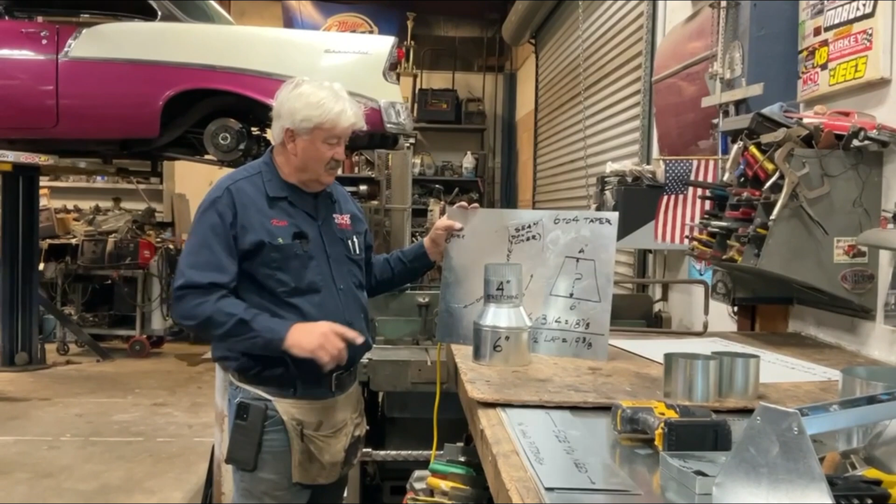We've made a funnel, and today we're going to add a collar on each end, turning it into a transition. So what we have here is we used the funnel we made last time, and I added a 6-inch collar to one end. That's one of the things we're going to do tonight. We're also going to add a 4-inch collar to the other end.

We talked about this before, that whenever you have the opportunity, if it's up to you to decide how tall your transition can be, then the shorter you make it, the more likely it is that your apex is going to end up on the piece of metal that you found behind the shear. So what we have here is, let me grab my pen.

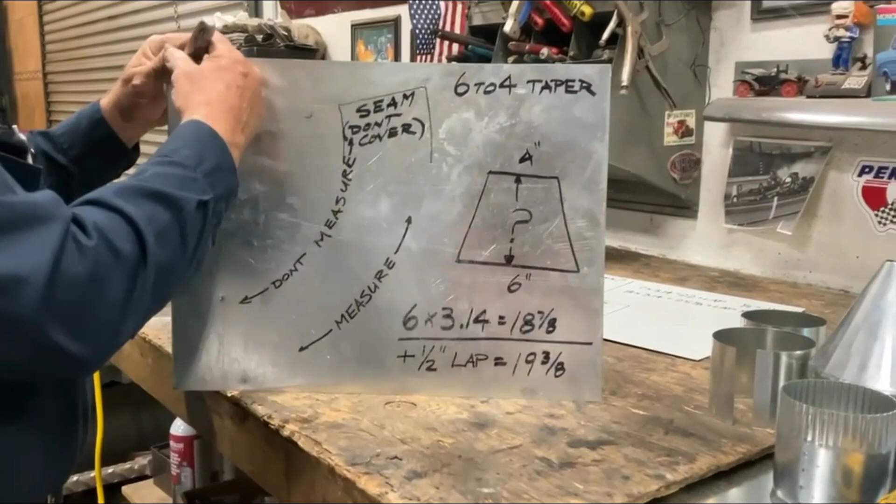So we've determined we're going to make a 6-to-4 taper, but we could draw the entire taper. We could project this line up, and that line up, and where those two lines intersect, that would be our apex.

But we don't need to draw the entire cone. We can draw half the cone. Let me show you where half of it is right here.

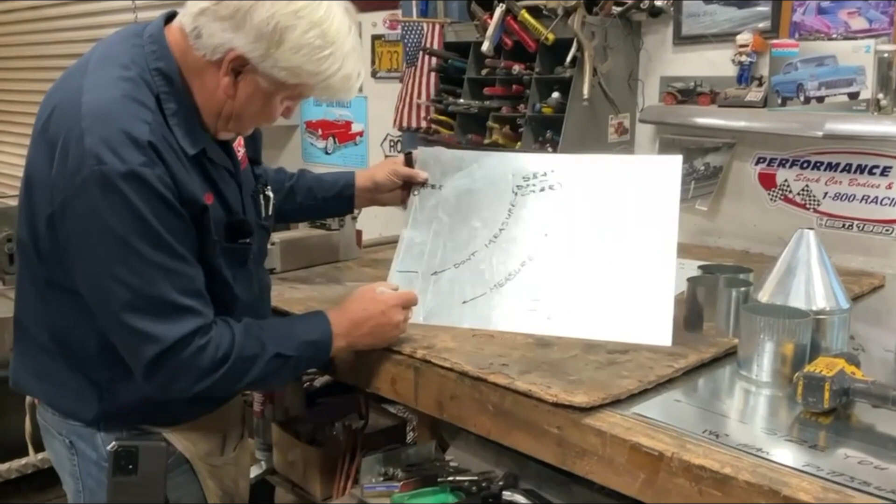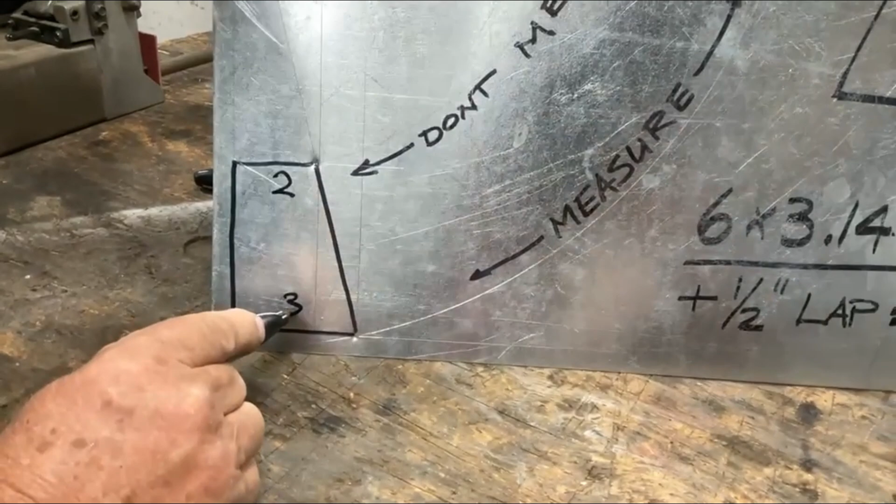I'm going to try to do this with the least amount of glare possible. So this is half of our cone. It's a 4 to 6. So we all understand this is a 2. This is 3, 3 is half of 6, 2 is half of 4. So we've drawn half of a side profile.

Now I like to start with a half-inch line in from the edge of the metal. So we're going to take our scribe and make a half-inch line. Now we're going to take a straight edge from that point to this point, and it's going to come up and meet here at this apex.

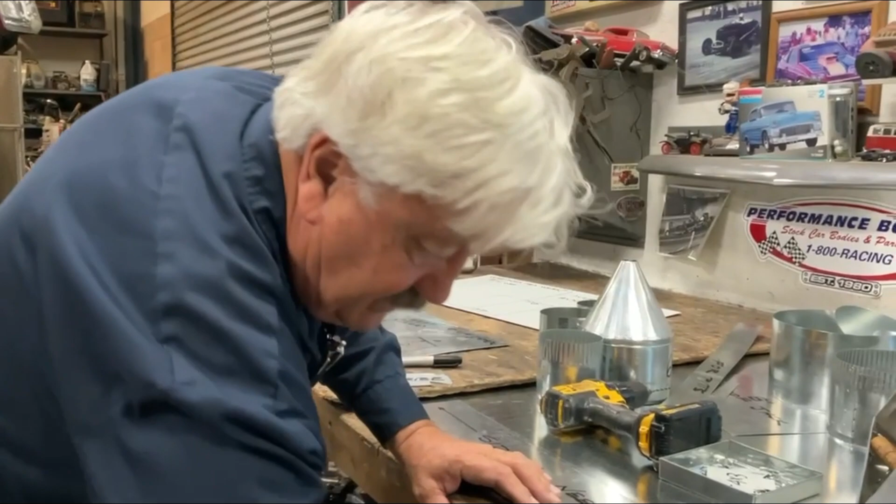From that apex, we are going to take our dividers that we keep right here next to our heart, like a letter from home. We're going to put one end of our dividers at the apex, the other end at this part of the side profile. Here we go.

And we are going to drag our divider and hold the metal. Now we're going to move up to this one, keeping our other part of our dividers at the apex. Just go back and double check it. You never know when, in the adjustment, you may have moved and thrown everything off.

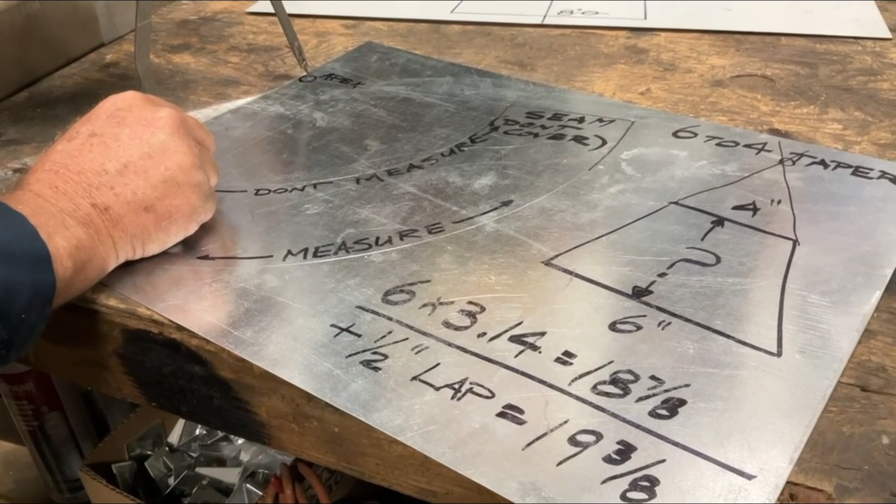Now we're here, we're going to go ahead and make this line. As you can see, I've already made this line, but we're going to go ahead and make it here for clarity. All right, now we are going to reach into our hidden compartment. There it is, tape, ruler.

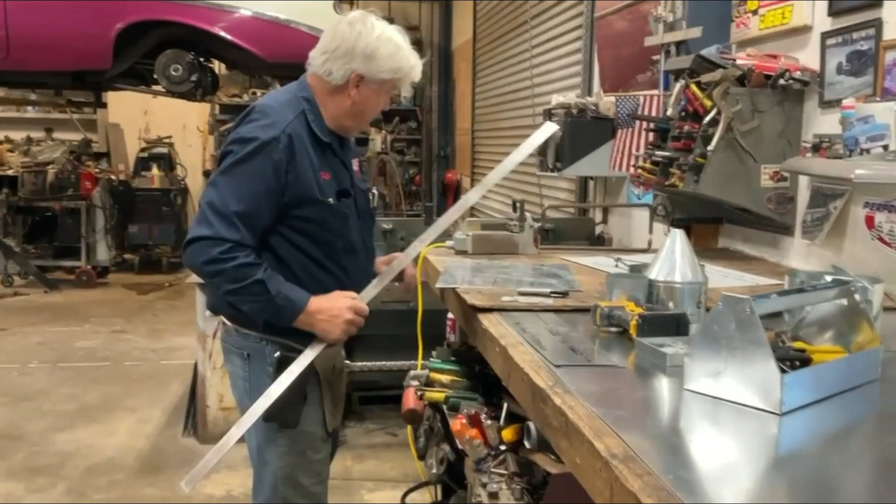Reach over here to our screwdriver that we turned into a scribe. Now come on back in nice and close. So we're going to go right back to the point where we're at the half of our profile.

And we've only drawn a half because that's all we need. Really all we needed was this distance and this distance, so we didn't need to draw the whole profile. So we're going to start at this point and make a line beginning at the apex back to this corner.

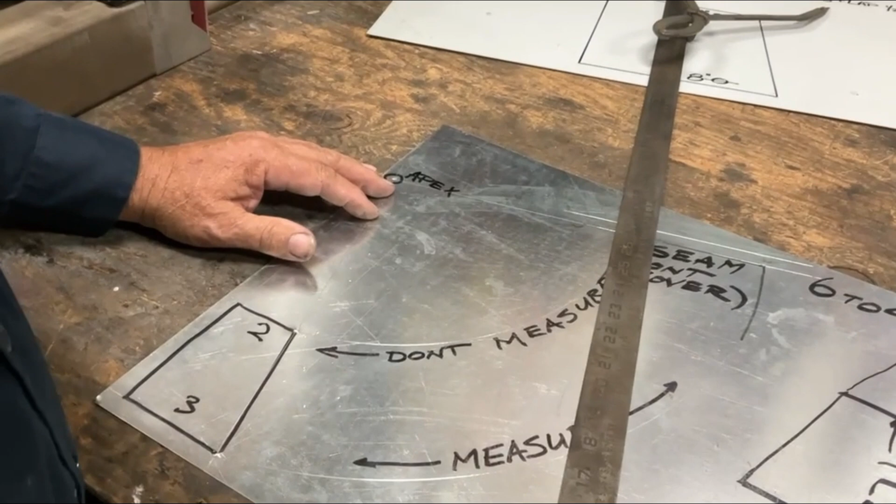I like to use a scribe because it makes a very fine line, and then if I ask you to cut this out, you don't have to ask me which side of the line you'd like to cut it on. Let's say instead of a scribe,

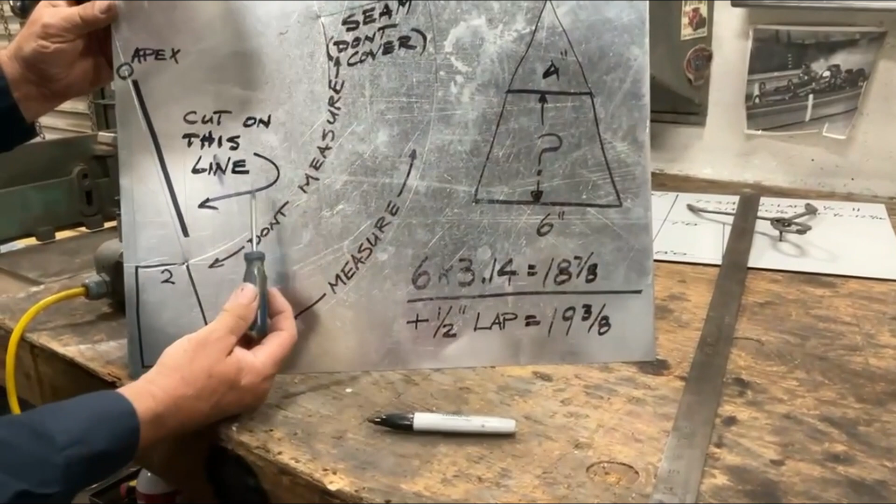I used that felt marker, and I told you to cut it on this line. Without further instruction, you wouldn't know that I mean this side of the line, this side of the line, or the middle of the line.

So that's just one more variable that we're going to eliminate by using a scribe. The other thing nice about a scribe is it doesn't use ink, you don't have to wait for it to dry. And if it was a pencil, we don't have to ever sharpen it. So let's go back, we've swung two radiuses here.

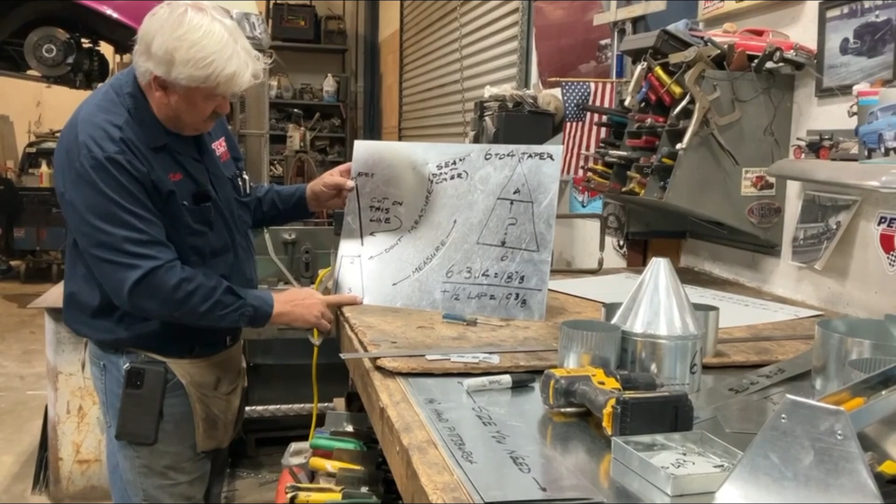One starting at the apex down to the bottom of the transition, one at the top of the transition, and back to the apex. You may not be able to see this line, but we just scribed it along here.

Now what we're going to do is the base of our transition is 6 inch diameter. We're going to take 6 times pi, 3.14, and that equals 18 7/8. So that is going to give us our stretch out, sometimes called SO, but we're going to call it stretch out.

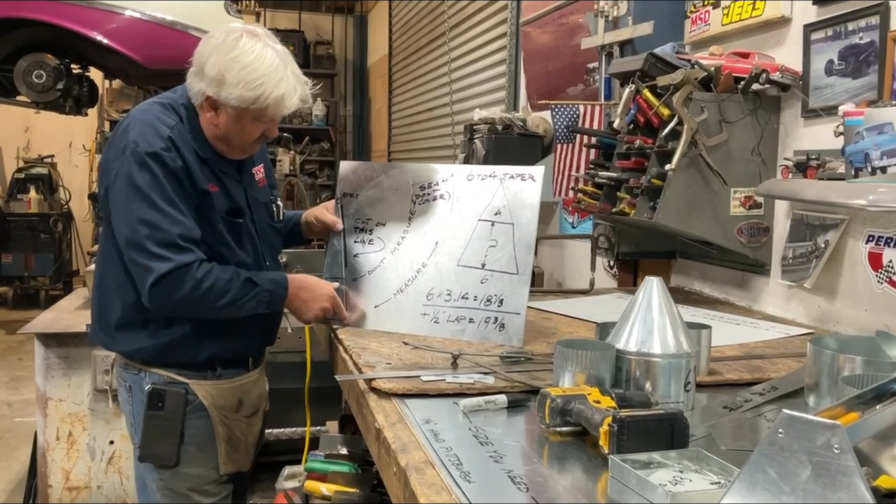So beginning at this point where our fitting begins, we're going to measure right on top of that line, and we're going to make a mark at 18 7/8.

This is where the steel ruler is nice. This is very difficult to do with a wooden ruler.

All right, so I'm going to put one part of my ruler on there. And since I've already marked it when you guys weren't looking, I've already marked it at 18 7/8. Let's go ahead and circle that.

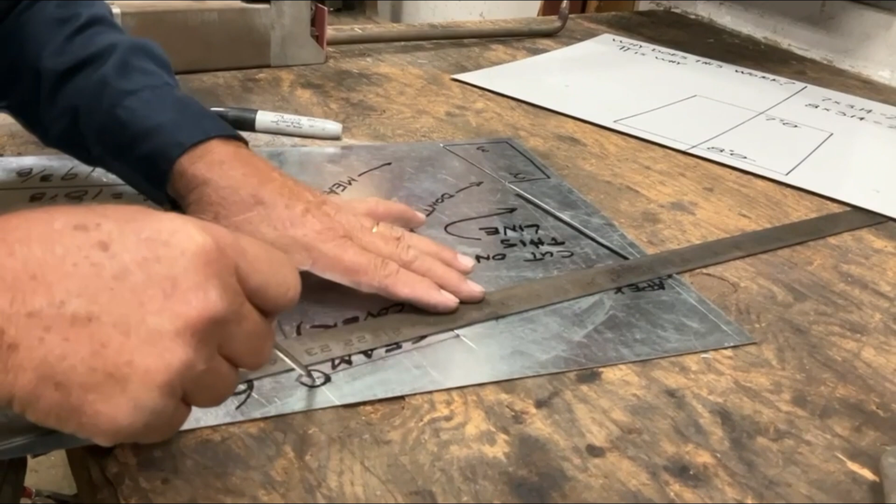There's the 18 7/8 line. And from that 18 7/8, since it's a taper, all these lines have to return back to the apex. I want you to come in nice and close here, because here's something that's very critical. We're going to go to this line that's 18 7/8, and we're going to go back to our apex, and let's just make a line.

So one of the things we've done just now, we just drew in this line from our established point back to our apex. That gave us our stretch out. You'll see here where I wrote measure.

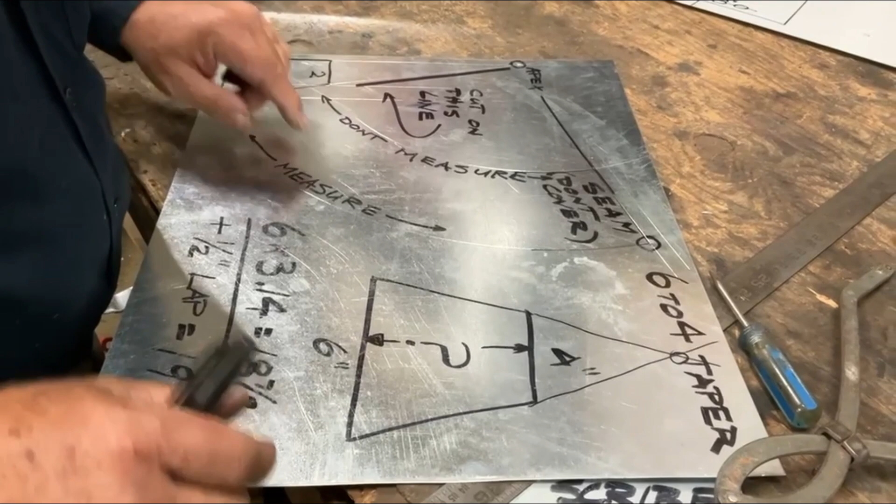We have to measure this distance. That distance is 6, because that's our diameter, times pi, 3.14. It goes much farther, but we don't really need that for what we're doing. This is going to work great. So then we've returned back to our apex.

Now the one on the inside, we don't even have to measure that. The reason we don't have to stretch out this measurement is because from this established radius point, if we draw this arc, that is going to be a 4 inch.

So we could, if we wanted to, begin at this point, do the math, 4 times pi, and if we stretched it out, it would be right there. But as it says here on the diagram, we don't have to measure that one.

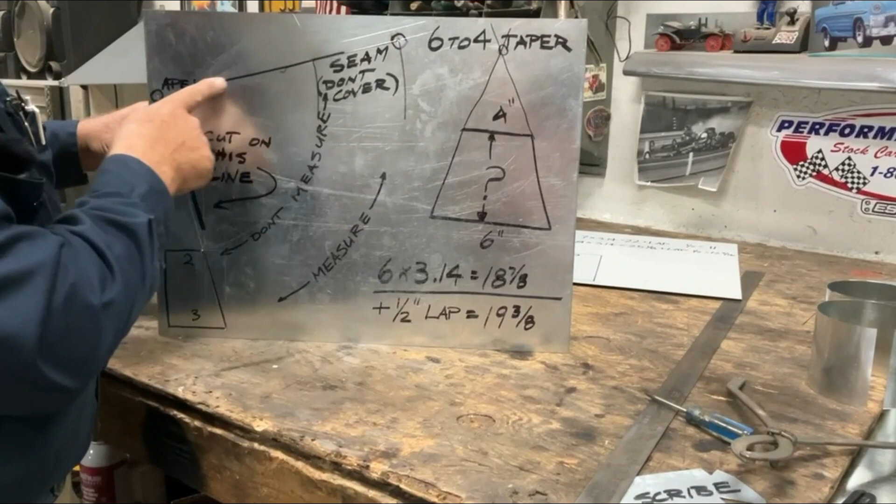We're going to get this one for free, because we've already measured the outside, and then we returned back to our apex. And when we swung this arc, this dimension is automatically going to be correct. We get it for free, we didn't have to measure it.

So we touched on this last time. So now here is our cone. Here's the taper, the transition that we're going to make.

Now what I want you to do is we're going to add a seam on here, so that when we put it together, it overlaps a 1/2 inch, so that we can make the attachment, we can make the seam.

Now we did this on the last one, but if you didn't watch the last video, this is very important. We're going to use a 1/2 inch lap. A 1/2 inch lap is very common. It gives us plenty, we don't need more than that.

So I'm going to measure from this established line where we went from the end of our measured arc back to our apex, and we're just going to add a 1/2 inch so that we can make this seam. We're going to add that 1/2 inch to the end of our fitting.

So here's what we're going to do. We're going to mark a 1/2. Again, using the scribe, it makes a nice small line. We're going to go here, a 1/2. And now we're going to connect those two lines so that that's going to add a 1/2 inch to the end of our pattern.

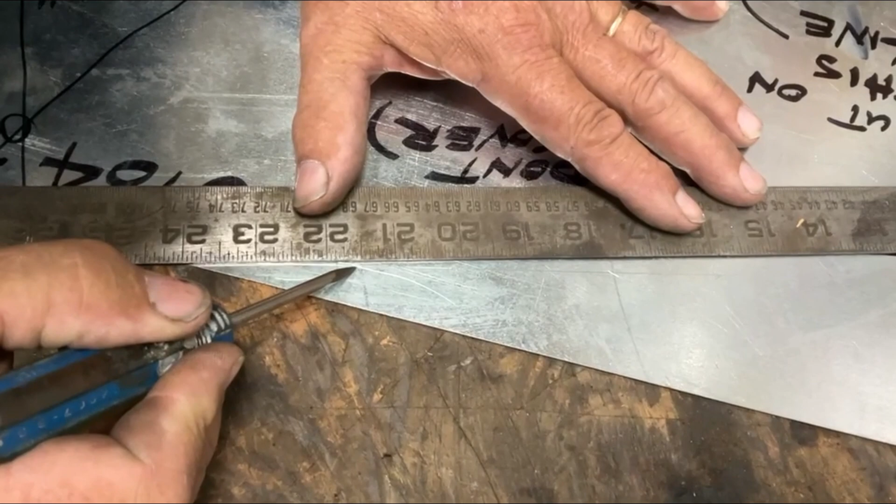One of the downsides to using a scribe is a lot of this metal has been slid across the table or in and out of the rack or off the back of the shear, and it will have scratches in it. So it would be very easy for us to see the wrong scribe line.

And you see, here's what I've done. See where I said seam, don't cover? There's our fitting. Now look, I've just covered it up. So I want you to make sure you don't cover up your fitting.

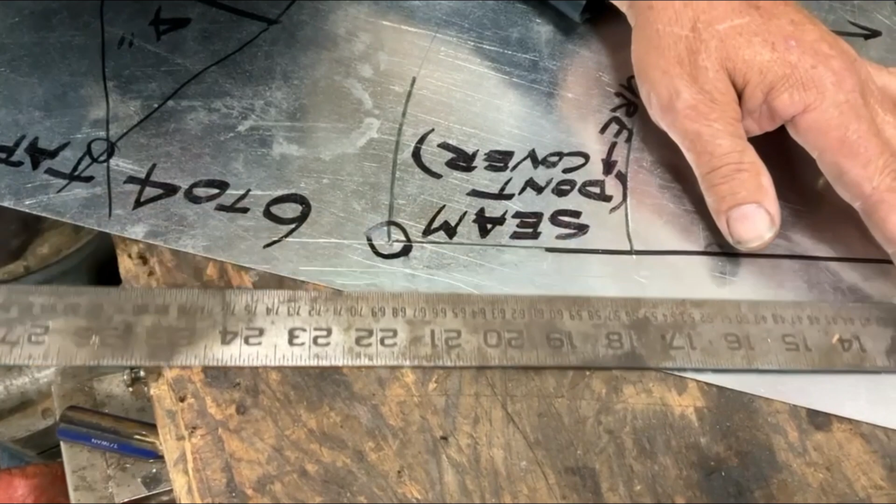We're going to come over here. We're going to find these two 1/2 inch lines that we've marked. Now I can see my fitting, and I can see the 1/2 inch that we've marked. And we're going to go ahead and scribe that line.

I'm going to see if I can make it a little darker so it's readable. There's the 1/2 inch that we've added to the end of our fitting. If we covered the fitting, I might think, oh, there's my scratch and there's my other one. And then I made a line right here.

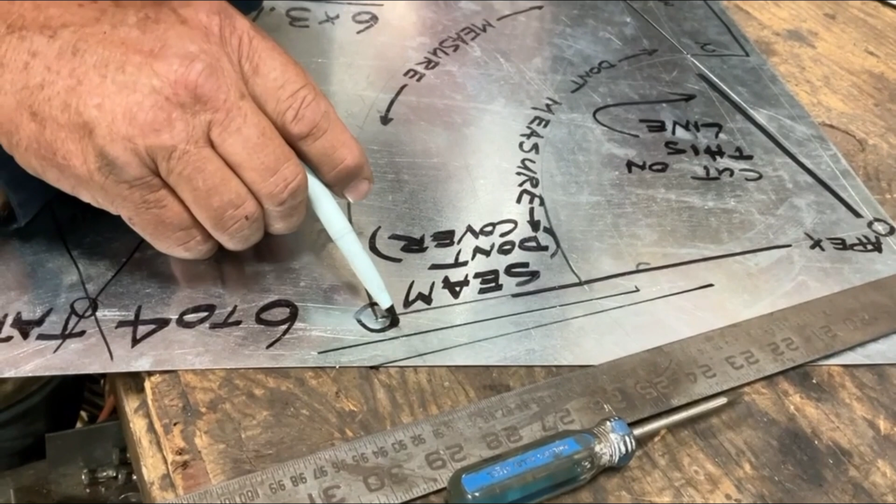And look, it's not in the right place. We didn't add a 1/2. We added an inch here and we added 7/8 there. So don't cover your fitting with your ruler.

Let's go ahead and take that off so that doesn't try to trick us. All right, at this point, let's go ahead and cut this out. Your red snips go in your right hand, because whenever you're cutting, you always cut in front of your body. This is your zone where your muscles work the best, your eyes work the best. You're right in front of it.

This is less favorable, right? So this goes in your right hand. The greens go in your left hand, and they cut this way. So we call these rights because they go in your right hand, but they actually cut to the left. These are lefts, so if somebody said, hey, pass me the lefts, they're going to want the green handle. And these cut to the right.

Again, that puts your project in front of you. This is your zone right here. You're going to cut this way with your left, or you're going to cut this way with your right. Always keeping your project in front of you. All right, here we go. Let's go ahead and cut this out.

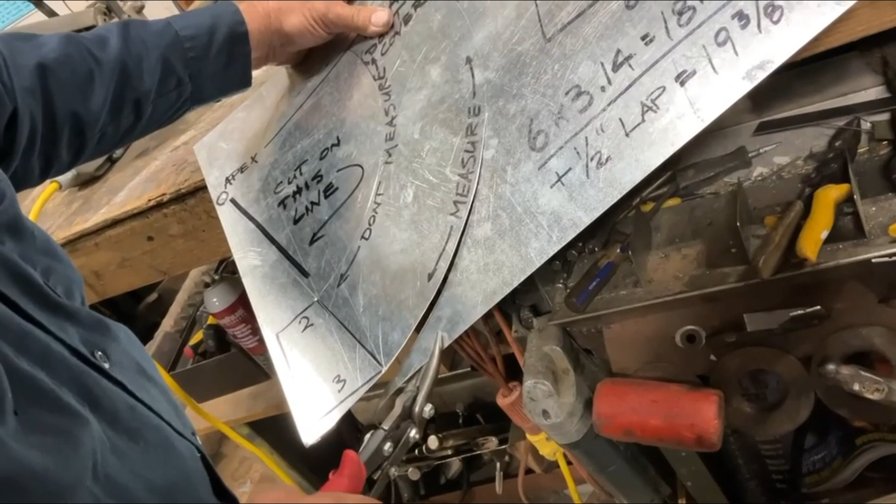One of the things I'm going to do is you never go to the end of your snips. I'm going to do this. We would never want to do that. Look, I don't have to tell you what a hazardous situation we've created for ourselves here. And even if you tell yourself, oh, I'm just going to be careful, I know I'm laying a trap for myself, but I'll just keep an eye out.

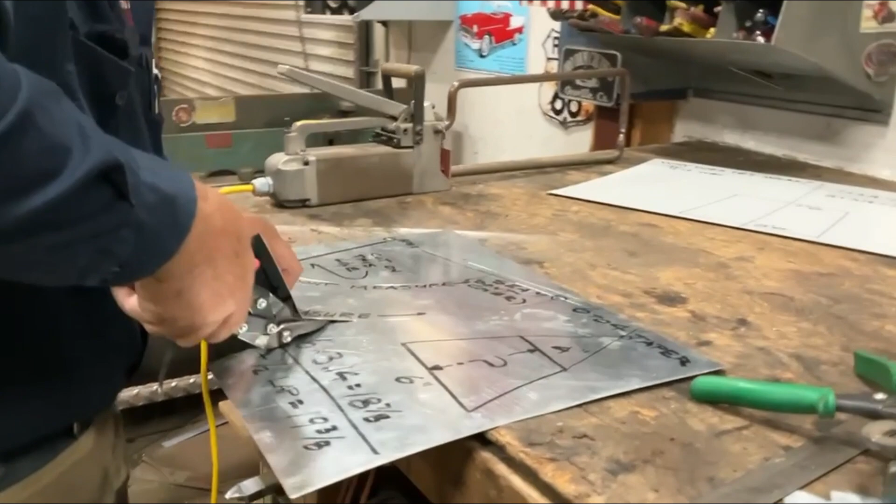Don't lay traps for yourself. Do everything you can. We're just going to get rid of this whole train wreck right here. Don't lay a trap for yourself. Give yourself the best opportunity for success.

So what I'm doing is I have my project over here, and this is the drop. We've talked before about the 85-15 rule. 85% of the energy that goes into cutting actually performs the cut. Somewhere around 85, and then again somewhere around 15.

About 85 goes to the cutting, and the other 15 goes to the spreading, because you can't move your snip forward until you spread the material far enough apart to allow you to move forward to continue to make the cut. So look what I'm doing here. I'm letting gravity pull this section down. So this is my drop. I'm letting gravity do the work, the other 15% of the work for me.

So we're going to continue to cut this off, and then right before we get to the end, we don't want gravity to drop this on our toes. Gravity is awesome when it's working for you, but man, when it works against you, it's a cruel taskmaster.

These are our straights. These are our long straights. So we talked about reds and greens. Reds go in your right hand and they cut to the left. Greens, left hand, they cut to the right. So this way we're always cutting in front of ourselves.

These are yellows. They cut straight. These don't cut radiuses very well because they're not intended to cut radiuses. These are made for making straight cuts. We're going to notch these pieces out, and when we do that, we're going to use the yellows. Yellow is for straight. Red is for left cuts or straight. Green, right cuts or straight. Cuts to the right. Goes in your left hand.

So we're going to do now, we're going to do the same thing we did last time. Now, one thing I like about the offset snips, this snip has an offset which puts your fingers, in my estimation, up out of harm's way. You see where my fingers are? I got a little space right here. If I'm making that cut, I've got a little space.

Let's go ahead, I've got some drop off here. Look where my fingers are. They're out of harm's way.

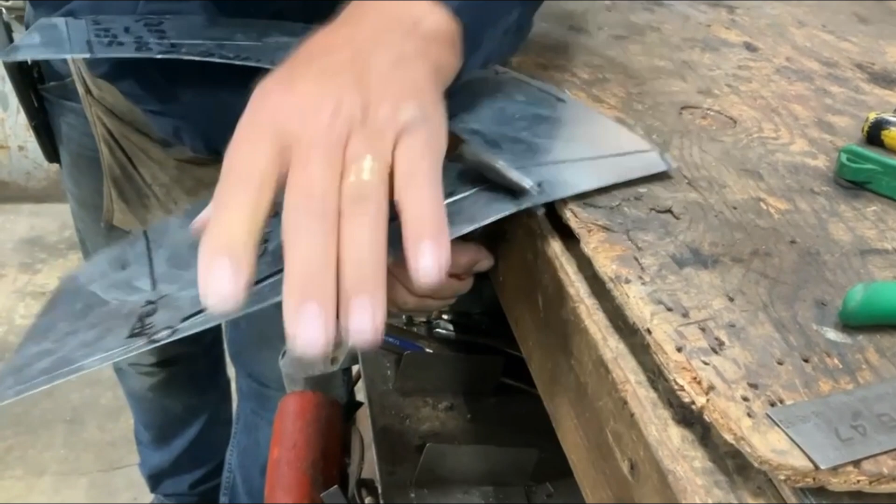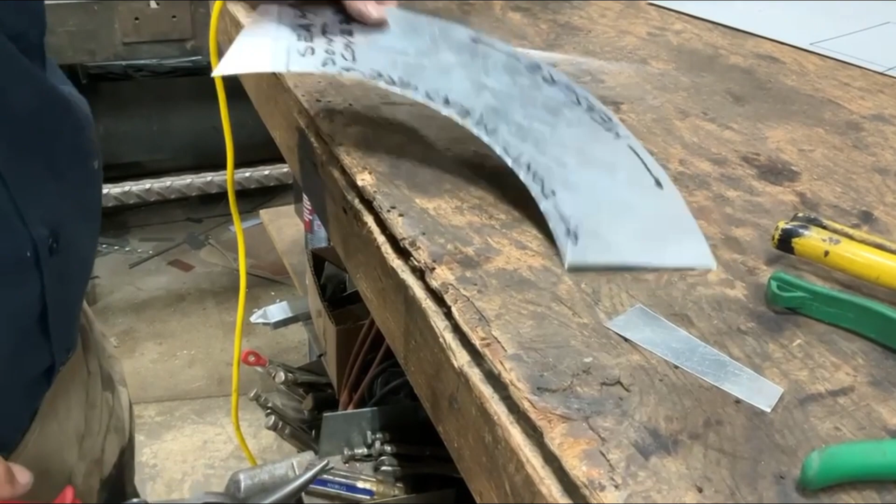Let's take our straights, cut this right here. I mean our reds—I already told you reds cut left and straight. Now we're going to come over here and make sure we don't cut off the seam that we added. Here's our fitting, and here we added a half inch for a seam.

All right, let's go back to the rolls. I want to show you how we're going to roll this up on the slip rolls. Here we are at the slip rolls. This is a 3-foot slip roll. The front two rolls are geared together. There's a gearbox inside here, and these first two rolls actually pinch the material and pull it through.

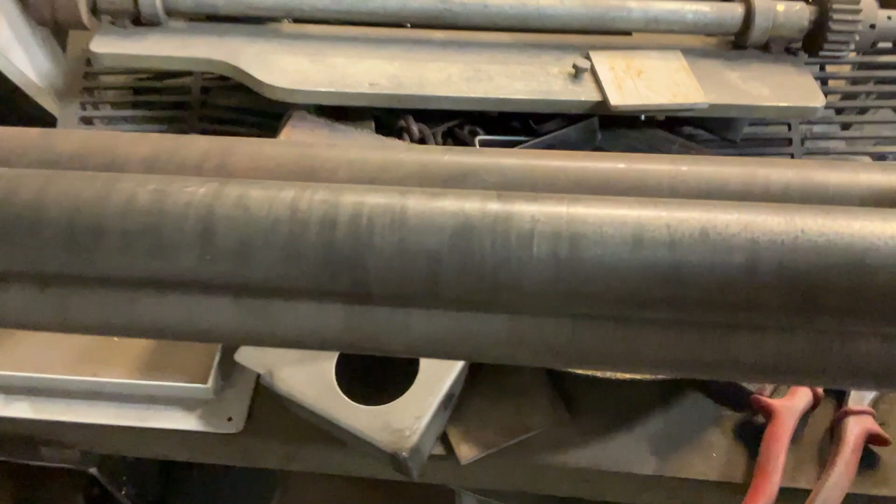The back roller is an idler. I don't know if you can see that rolling—the back one rolls freely. So whenever we turn the handle, if you look right here, these two rolls counter-rotate, which makes them pull the material through.

In a minute we're going to roll up some collars, but right now we're going to roll up this taper. With a taper, if we were just going to roll a cylinder through, we'd want everything parallel. But what we're doing here is not a cylinder, it's a taper, so this is just a piece of metal that I bent up. Really, all we need is anything at all that would fit in here.

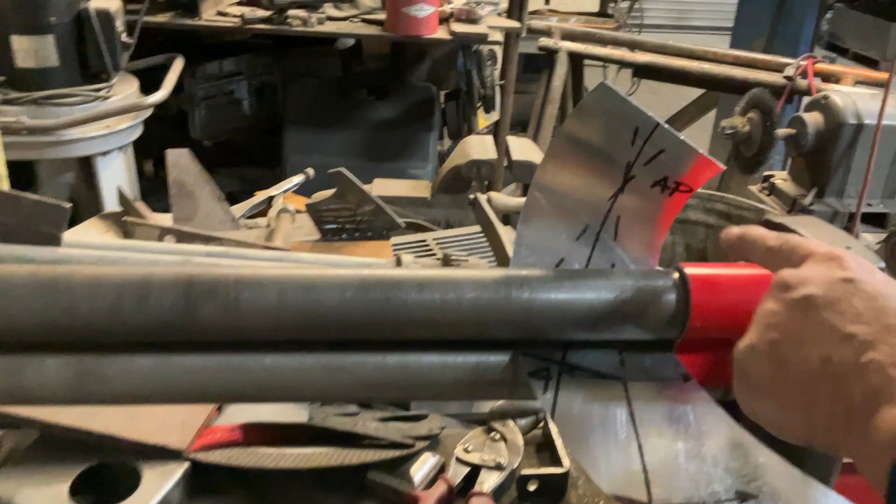We want to cause a little bit of friction right here at this seam. By causing friction on the inside, we're actually going to slow this down, and as it pulls it through, it'll roll it into a cone. I haven't checked this to see if it's adjusted right, but let's just see what we got. See, what happens is when we're generating friction right here, it's slowing down the inside radius, and it actually rolls it into a cone.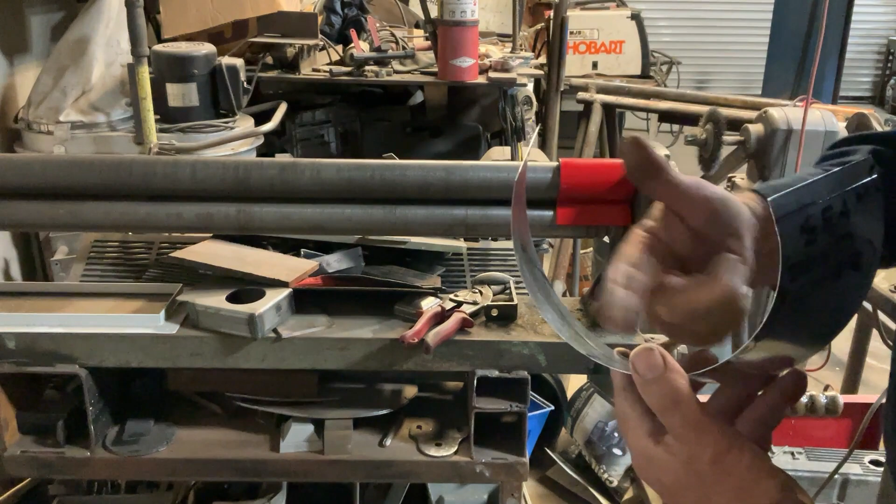So we're close. We're going to tighten up the front a little bit, which is going to grab the material a little more, and then we're going to bring in that idler roll in the back. The more we bring in the idler in the back, the smaller the radius will become. Let's run it through again, see what we got. All we're doing here is creating friction at that intersection.

Oh, doesn't that sound great? Look at that—by creating friction, we're able to roll it up with one diameter being different than the other.

We could have done this with almost anything. Sometimes you can use a piece of angle iron, sometimes people use whatever's laying around. But this is a piece of metal I had, and I just bent it in the box and pan brake, and that way it stays there whenever we need it to. Look at that, rolled up a nice cone.

Let's go back to the bench, because now that I showed you how to roll up a cone, we're going to go back and roll the collars, and those are going to be straight. I'll show you at the same setting what happens without our friction brake in here. Let's go back to the bench and we'll notch that.

All right, so what we're going to do is make a transition from 6-inch to 4-inch, because that's what we need. This could be a 6-inch downspout, a rain gutter downspout, and sometimes we have to go down to a 4-inch to get into that underground plumbing.

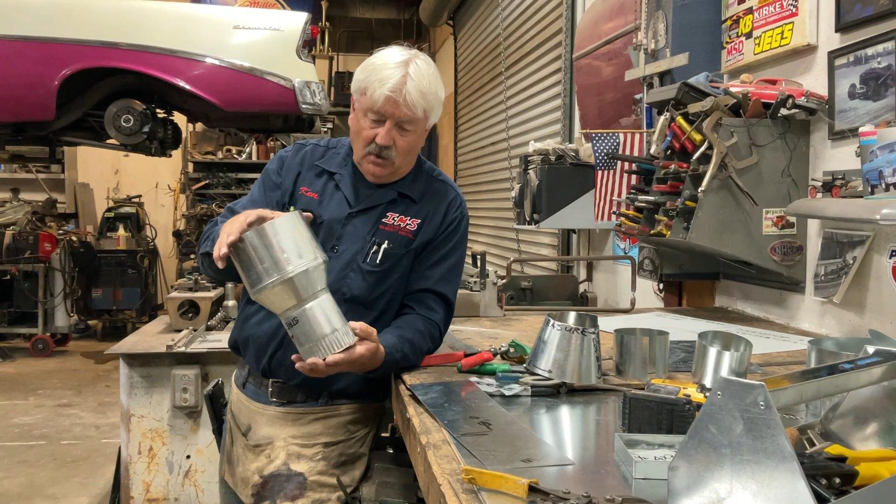Or we've installed water heaters, because we also do plumbing, heating, and air conditioning. The old water heater may have a 6-inch vent, and the new water heater or new furnace may be more efficient and have a forced air draft inducer. So what they do is make the vent pipe a little smaller. Sometimes we may need to make a transition from the existing 6-inch in the ceiling down to the new 4-inch we have for our new equipment.

So this could be for a furnace. This could be for a downspout off of a rain gutter. This could also be for air conditioning.

A lot of the bathrooms here in the States, they'll run 4-inch to a bathroom. That's a pretty common size.

So the one thing I want you to know is whenever we make our collars, now that we've made our transition, make the collar the size that you need. We have a 6-inch and we have a 4-inch, and it's critical that you make the collar the size you need. The mistake you can make is you made your transition the wrong size.

You missed a dimension, or you cut a line that wasn't your line. You thought it was, and then once you roll it up, you realize it's wrong. The one way you can make that mistake even worse is, now that it's the wrong size, you cut your collar down to match the incorrect dimension on your funnel that you made a mistake on.

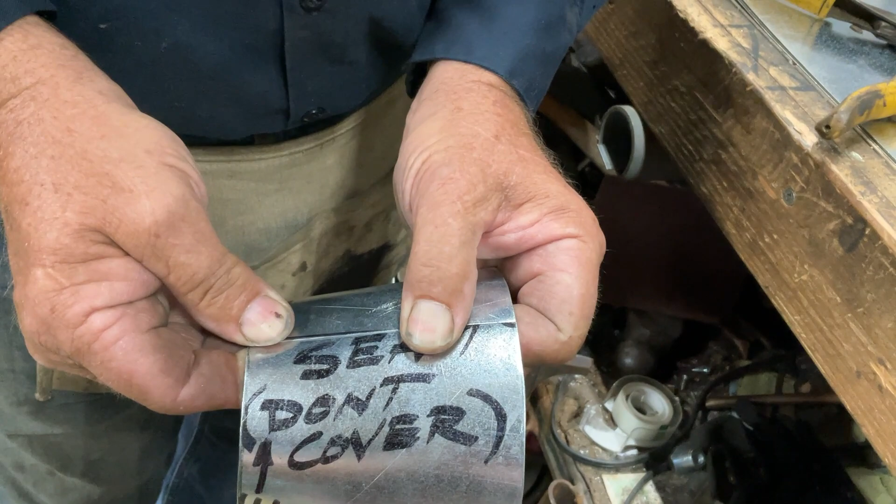But we could make some minor adjustments here. I can stretch this out. Say I don't have a full 1/2 inch lap, but I made a mistake somewhere, and I can still save this thing by expanding it and contracting it, making this diameter a little larger and a little smaller. We can't do a lot, but we can make a little difference.

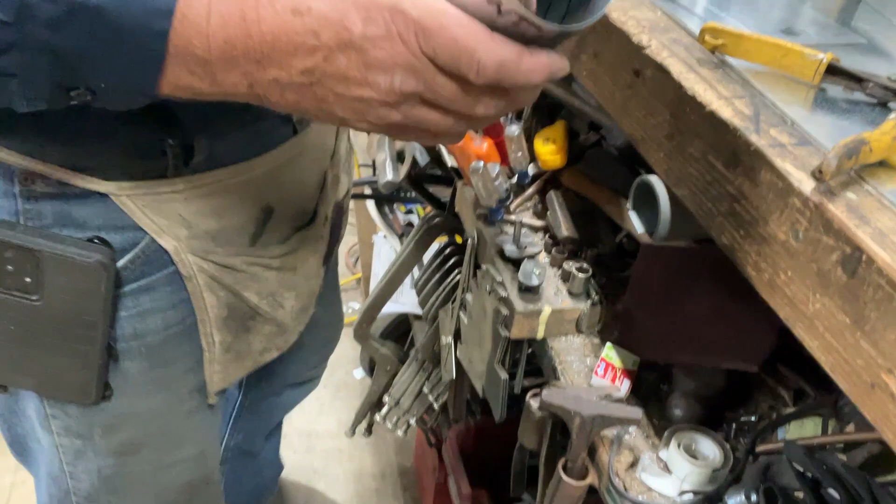So instead of a 1/2, maybe we have a 3/4 inch overlap. Or instead of a 1/2, we'll go to a 3/8, thereby changing this opening size. But only change the opening size to accommodate the appropriate, proper diameter that you need.

All right, so what we're going to do here, we're going to make our collars next. We're going to make the 4 inch. Since we're going to be stretching on our 4 inch, there isn't going to be any notching. So 4 inch we already got, but let's go ahead and put our 1/2 inch lap. So I've scribed a line on here 1/2 inch in from the edge.

Now the next one is, we're going to do a hand Pittsburgh here, just in case you guys haven't seen this. It's a 1 1/4 hand Pittsburgh. There's my 1 1/4 allowance. So I've made a line at 1 1/4, 1 1/4 there, and 1/2 inch for our lap.

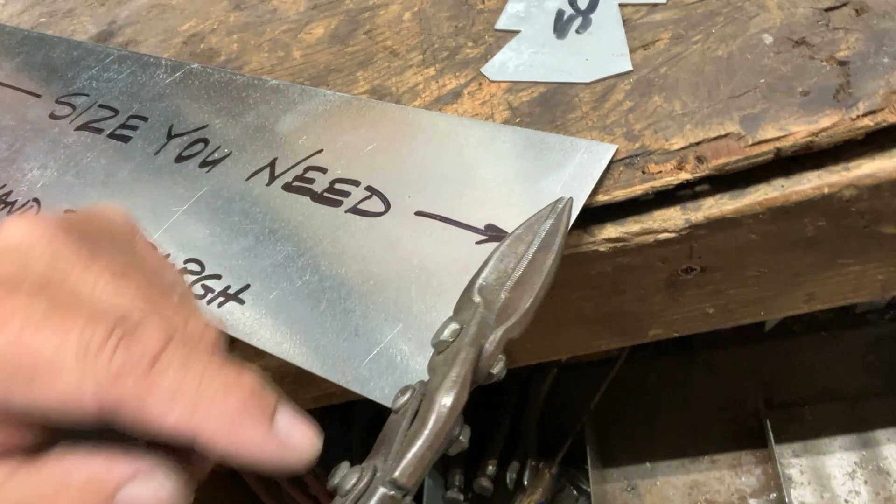Now we're going to notch this out. The only time you go to the end of your snip is when you're notching. And I really like to notch with straights. I showed you earlier that if you tried to make this cut with the straights, your hand will end up in a bad place. But look, if I'm just notching, my hand is out here in a good, safe spot.

So this is going to be our hand Pittsburgh. We're also going to do a machine Pittsburgh. So here we go, let's do that one. On machine Pittsburgh, the machine can get it done in a 1 inch space. When you make a Pittsburgh by hand, it takes a little more room.

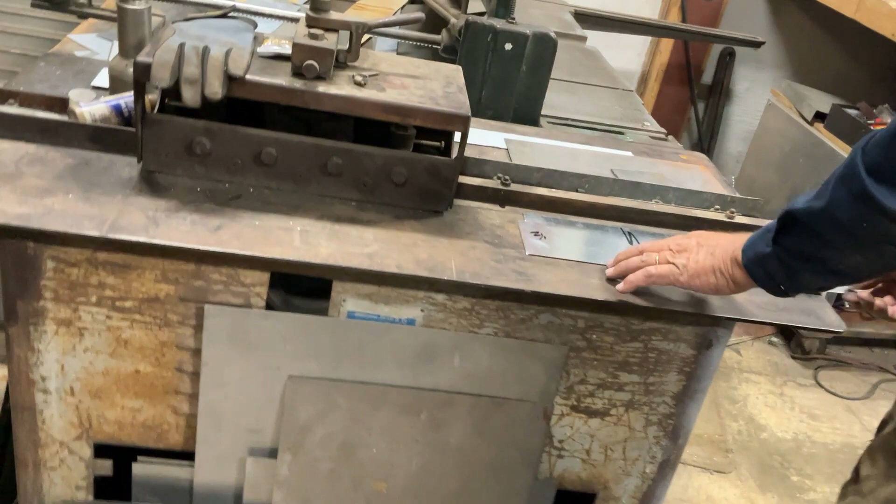I'm going to turn on the Pittsburgh machine. We're going to run the machine Pittsburgh through. With a 1 inch allowance, we're going to run it through the machine. Take a look at that.

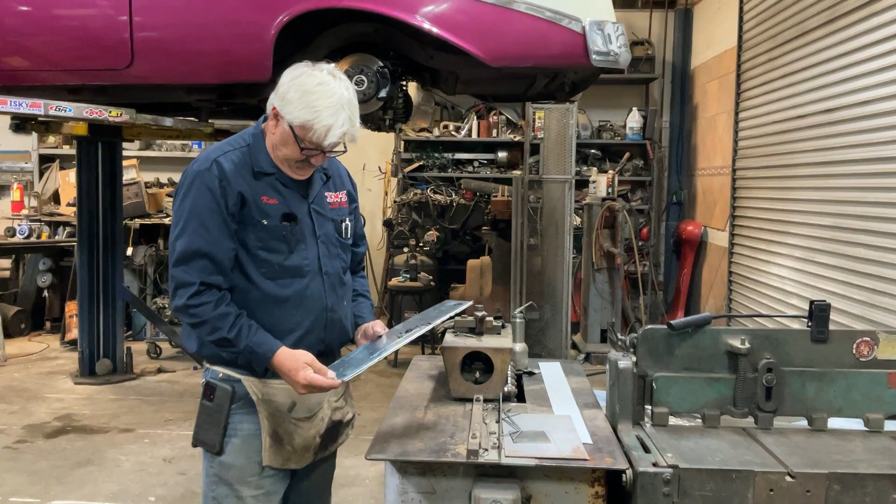So this machine has 5 stations, and each station performs a small fabrication process. It starts out, the first one it might just put a little bend in it, and then when it gets to the next roll, it might fold it all the way over, and the next roll may kick it back around the other way. But after it goes through all these stations, can you get that in there? I'm going to get it really close. There, can you see what's going on right there? That's a Pittsburgh.

So now we've shown you how to do a machine Pittsburgh, where if you're going to work in a shop, they're going to have a Pittsburgh machine. But let's say you're working at home and you don't have a Pittsburgh machine. We can't do it with a 1 inch allowance, but we can do it with 1.25 inches. Let's go over to the brake and bend up this hand Pittsburgh.

The first bend on a hand Pittsburgh is always that 1.25 inch allowance. We have to make this bend first, or else the Pittsburgh is not going to work.

So I'm lining up that scribe line with the nose bar. That's the front of the brake. This is the bending leaf.

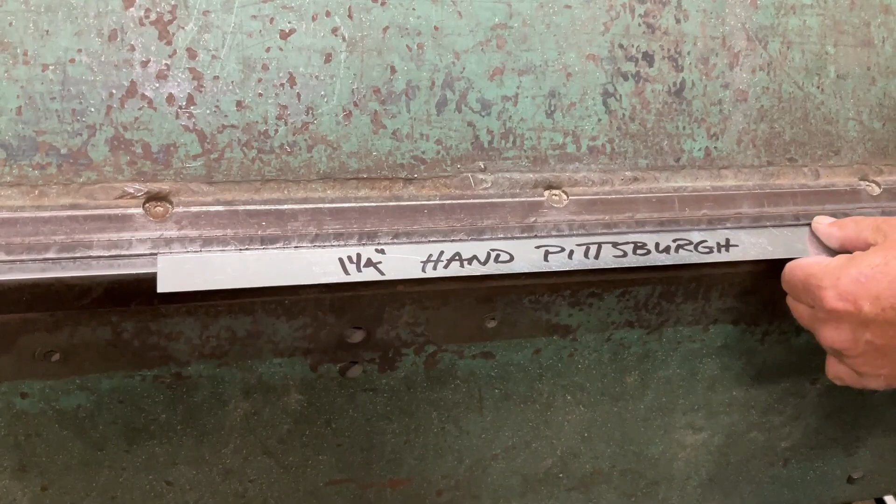There's our 1.25 inches. We're going to go a 90 up. When this is flat like a table, that's 90 degrees. This is the clamping handle, the one that closes down and grabs the material. This is the bending handle.

So we're going to open up the brake. Now we've made a 90-degree bend at 1.25 inches. Now we're just going to push this in. Now this is a 1/2 inch bending leaf, so we're bending a 1/2 inch.

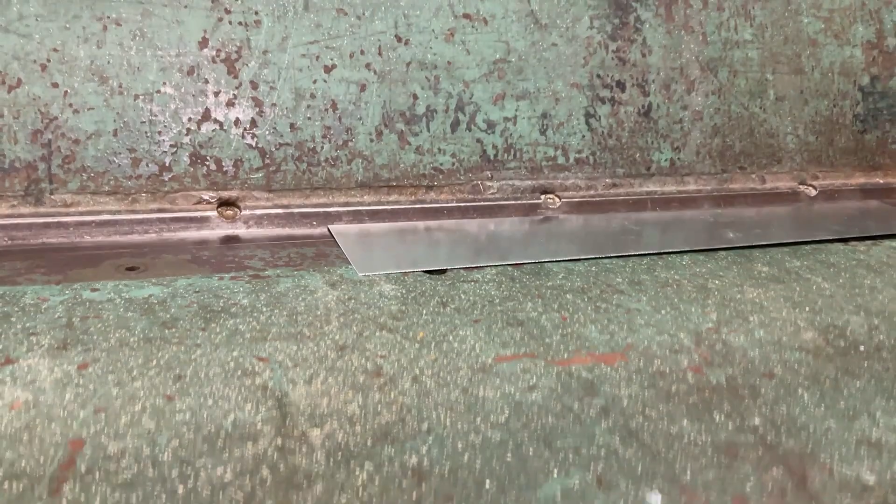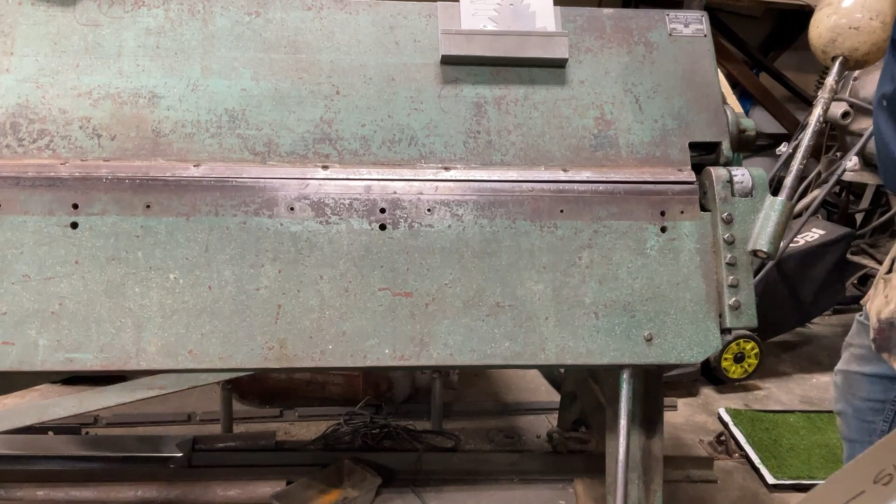On this one we got to go all the way over, till it stops, which in our case is 135 degrees. When it's flat like a table, that's 90 degrees. If you go all the rest of the way over, you're adding another 45 degrees for a total of 135, which is what we have here. That's 135 degrees.

Now we're going to flatten that out. Now we're going to push this over. Now we're going to flatten this out. So that's what we have so far. Now we're going to flatten this out. Now we're up to that.

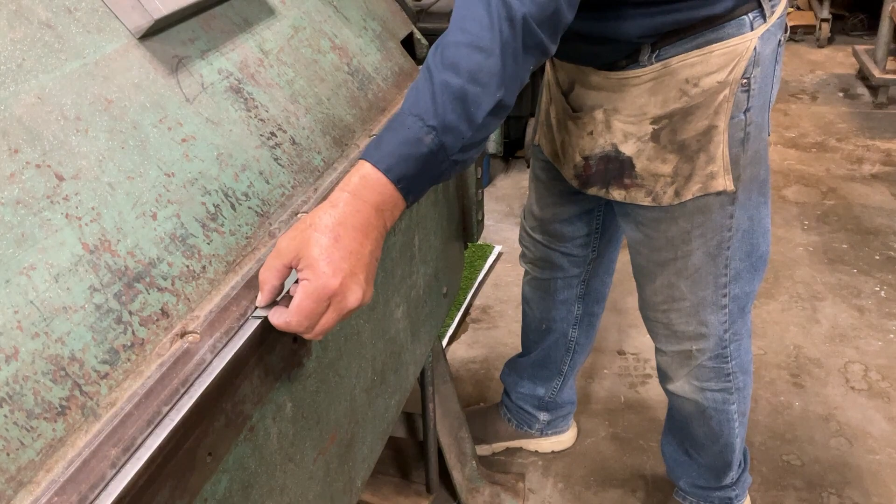We're going to hold this back just off. Get a really close picture of that right there. I don't want to go there. I want to come back about twice the thickness of the material. This material is 26 gauge galvanized.

We're going to give that a little kick, somewhere around 45. When the front of the bending leaf is parallel with the rest of the brake, that's a 45.

Now I'm going to take that out, flip it over, and I want to go about, let's say, 1/8 of an inch. Now, oh, it's right here. Snake would have bit me. We're going to tap this down just a little bit.

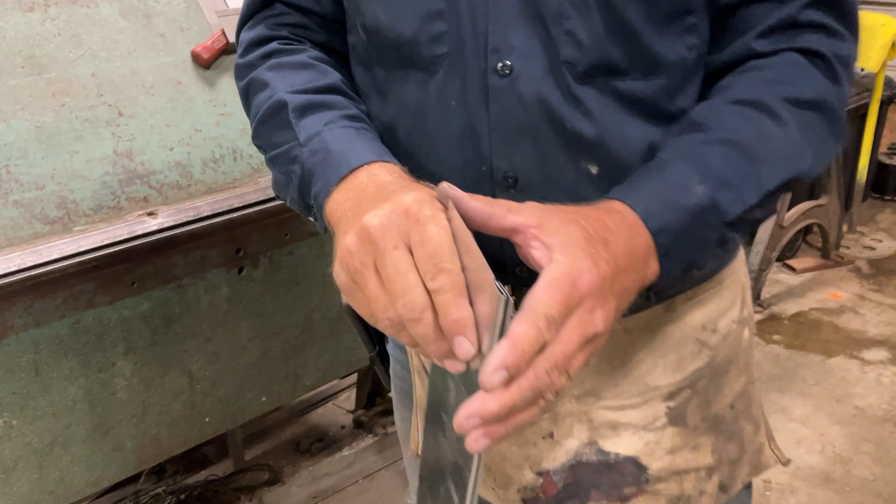And look, we have made, am I too close right there? We've made a hand Pittsburgh that looks the same as our machine Pittsburgh.

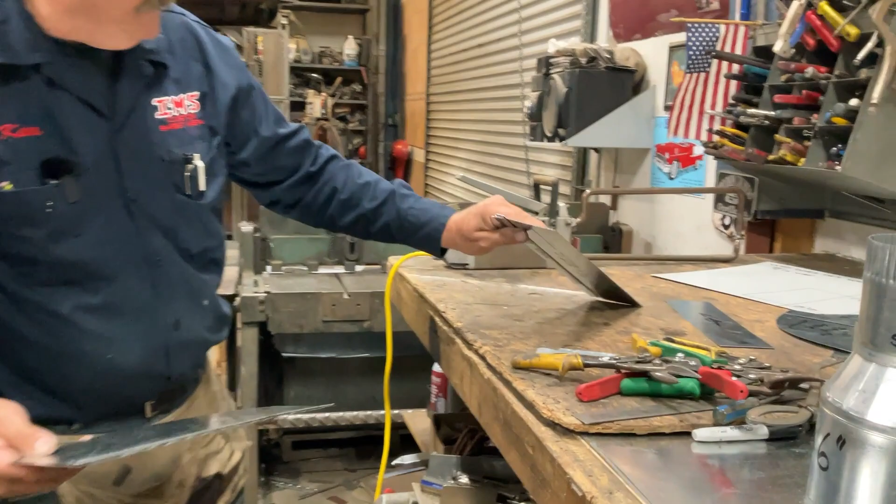Let's go see what it looks like compared to the machine Pittsburgh. All right, here's our hand Pittsburgh. Here's our machine Pittsburgh. This is the hand, this is the machine. You can see the machine is able to fold it and do it a lot more compactly than we were able to do with our brake.

The next thing I do whenever I am going to run a Pittsburgh on a collar is let's find a scrap, a piece of scrap. And I'm going to push it into that void.

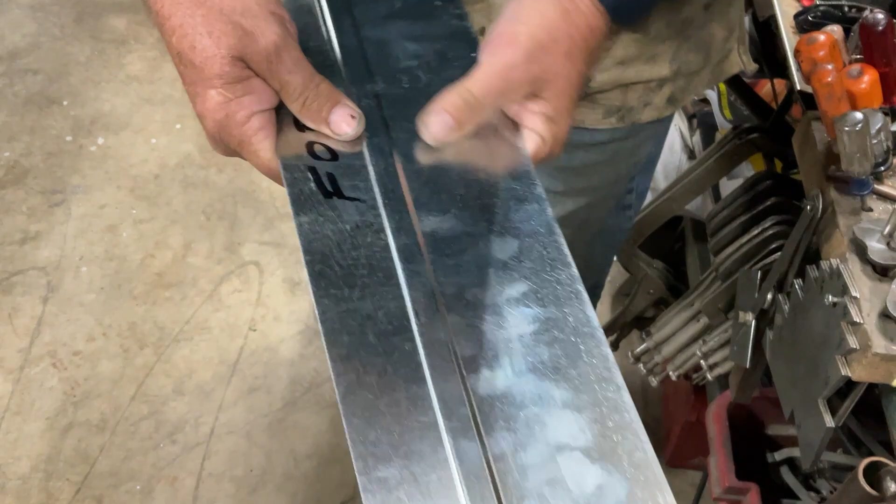All right, let's go back to the rolls. All right, here we are back to the slip rolls. The front two drive rolls are driven. The back one is an idler. It moves in and out, and that determines the diameter of your project. So this is our hand Pittsburgh. We grabbed a piece of scrap off the back of the shear and tapped it into that void.

Now what we're going to do is we're going to roll this up. Since we have 4 thicknesses, we're going to have to back this. We're going to open this gap up a little bit here. All right, we're going to roll this thing up. Now last time we rolled a cone. This time we're rolling a collar.

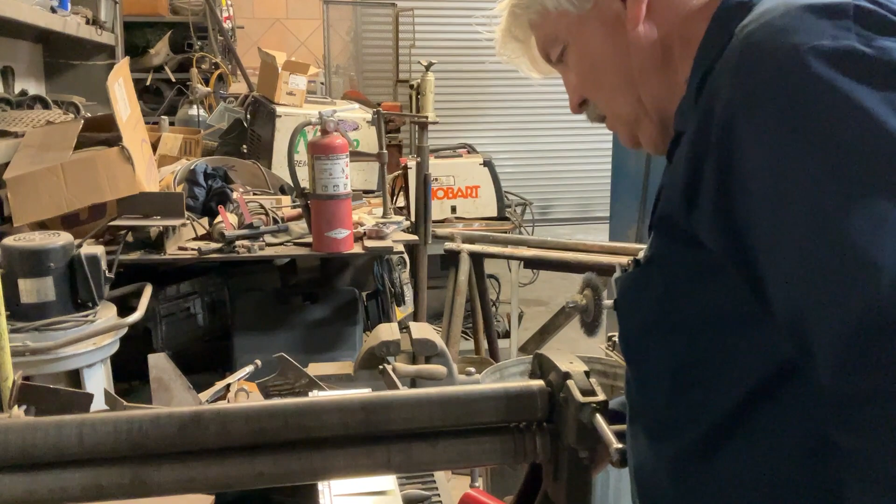Look at that. Since we've already, yeah, let's go ahead and keep going. So I'm going to bring the back roll in, the idler roll, and the tighter we bring that in, the tighter of a diameter we're going to have. So let's run that through, see what we got.

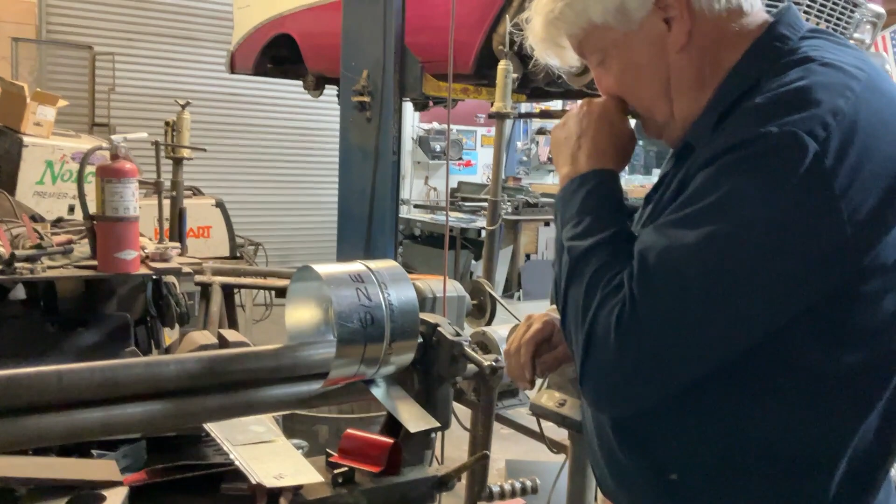The thing about a slip roll is one end always opens up so you can slide your project off the end. Yeah, there we go.

I'm going to go grab another piece of scrap off the back of the shear. Don't go anywhere. Are you still there?

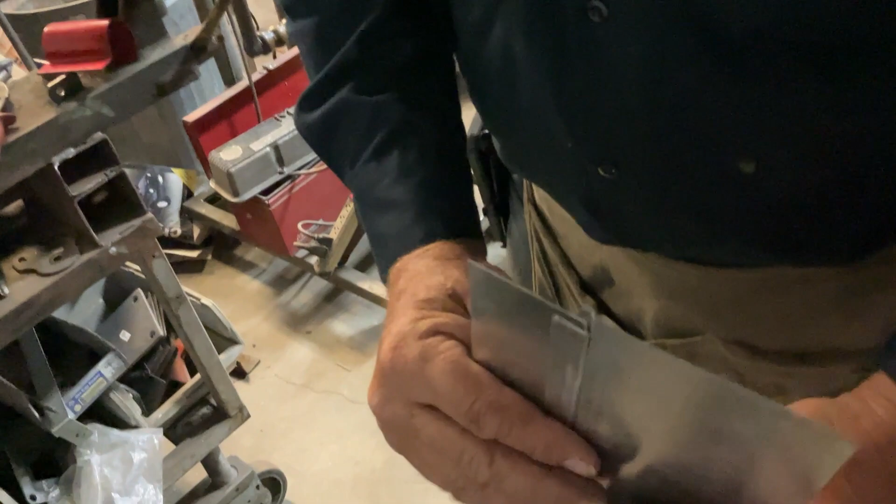Okay, so just like we did on the other one, we're going to put a piece of scrap into the Pittsburgh, because what we're using the Pittsburgh today, so don't get yourself in a place where you're trying to force something in there. Let's see. Use a hammer, tap it in. Tapping in with a hammer is way better than trying to push against 2 sharp edges of metal. So I've inserted this piece of scrap into the void of our Pittsburgh machine.

All right, let's roll this one up. Isn't that cool watching it come around?

The machine in Pittsburgh is a little tighter, so it actually affected the diameter. The diameter is different, so we're going to bring this idler in a little bit in the back. I'm going to run that through again. Open the end up, let it out.

Now we have the machine Pittsburgh collar rolled up. Now we're going to roll our 4-inch. We know these are 6s, so we know we can move this back in. We can tighten up that idler in the back because we're trying to make a really small diameter. I'm going to bring the front in and tighten this gap right here, so I'm driving the bottom roll up.

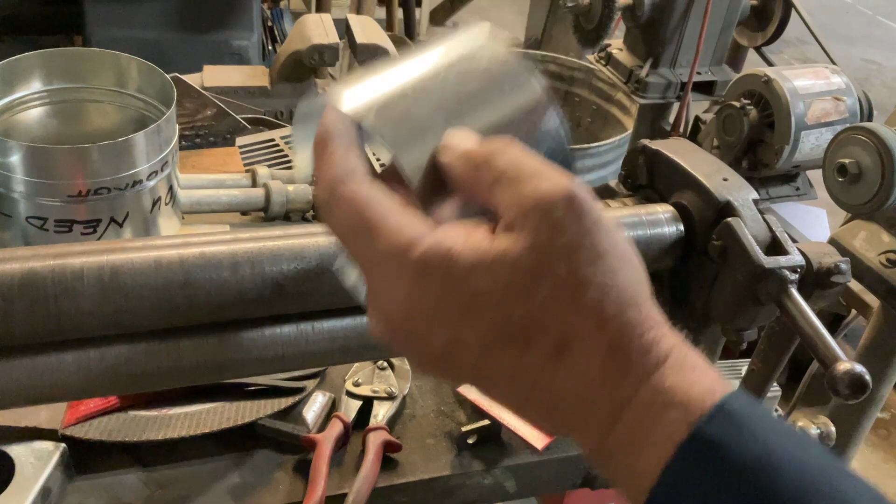Here we go, let's see what we got here. Tightening it a little bit more. One more. Now we're going to open up the end of the slip roll. Look at that, we have a 4-inch diameter cylinder.

So with this in place, we were able to roll a tapered cone because of the drag created on the smaller diameter. And now without it, we can roll up a straight collar. Let's go back over to the bench.

All right, so we rolled up our 4-inch cylinder, and we're going to go to the line that we put in earlier that we can't see without our reading glasses. Oh gosh, look, there it is right there.

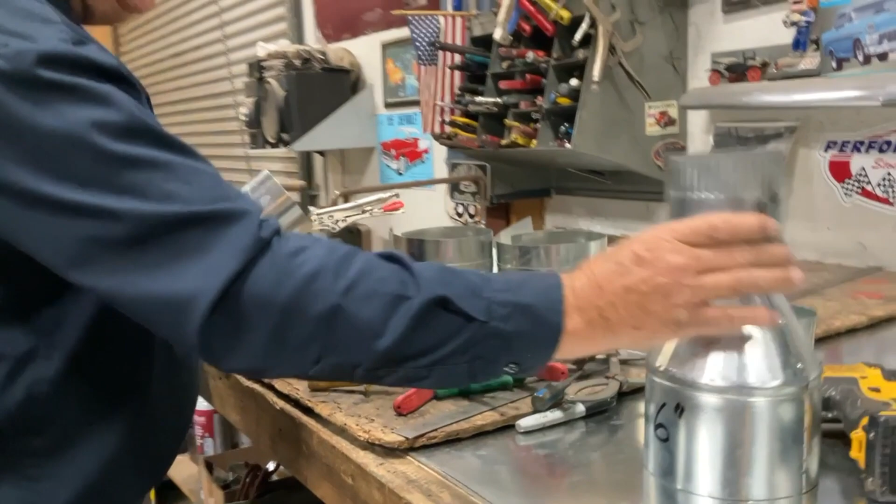Remember, always cut your collars to the size you really need. One of the things that we can also do is make one fit inside the other. We can crimp one, and whenever we crimp a collar, what we're doing is drawing in this circumference, the distance around the outside.

You already know the shortest line between two points is a straight line. So what this is, is it makes a crimped line, and because it's crimped, it actually minimizes the diameter. So by doing that, these are both 4 inches in diameter, but if we crimp one, we make it smaller so that one can fit inside the other. Without the crimp, one won't go inside the other because they'll both be the same diameter.

All right, now what I'm going to do here is spot weld this. This is a handy little welder.

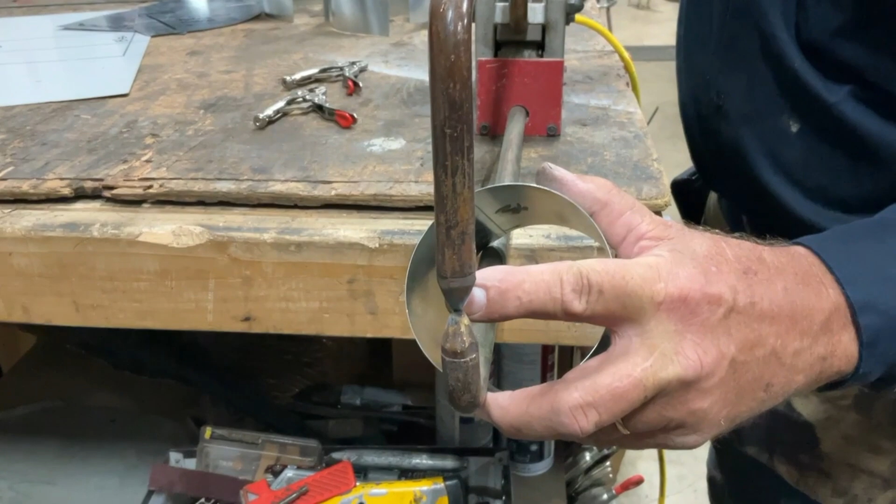There's voltage passing from one arm to the other arm, and anything that gets in the way, anything that gets in between completing that circuit, it heats it up. If you leave it on there long enough, it would become molten. So what we're doing is focusing the points very sharp, so we focus the footprint, the diameter of that transference. The smaller we have the same amount of energy going through, and the smaller the diameter of the spot, the more focused the energy is. So you're going to get a better spot weld, a more reliable, strong spot weld.

Now I'm using this small spot welder for here, because the diameter is so small, I need to be able to get inside there. Just real quick, I want you to walk with me over here.

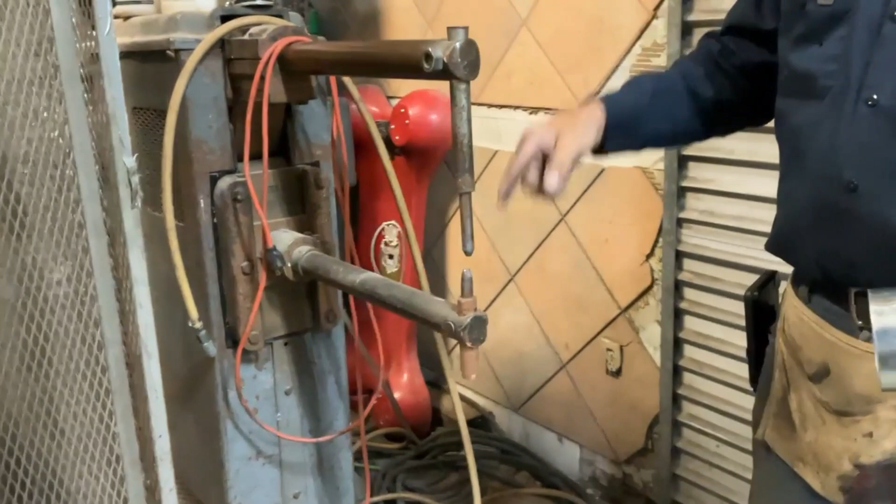This is Buzz, this is a big spot welder, but our diameter is so small we can't get our small projects into Buzz, but Buzz gets pretty hot. If you're not watching and not careful, and you don't have it set right, Buzz will knock holes in your project. That's not good. So this is what you're going to see in most shops, and the one over here is for smaller projects like this.

All right, I want to show you what we're going to do next. Oh, you know what, let's go ahead and put our cone together. Let's go put our taper together.

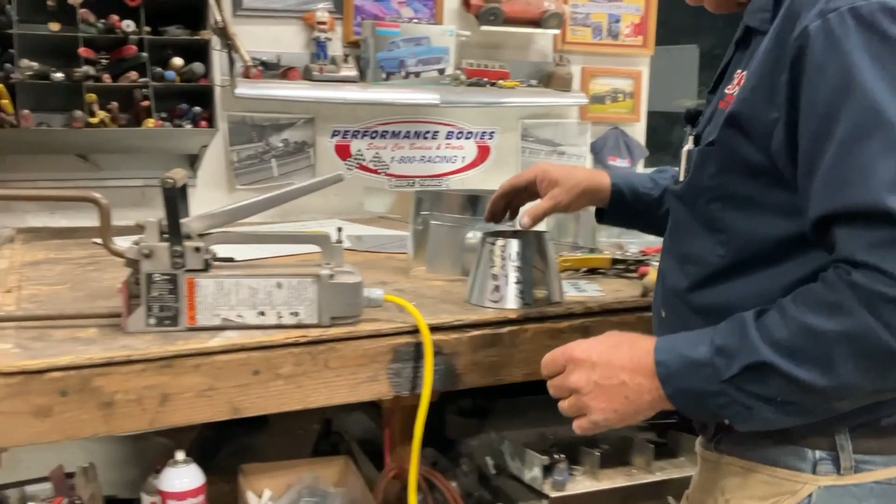We're going to go to our half inch line and clamp it. This is that half inch that we drew on there. You can see it inside there, half inch lap.

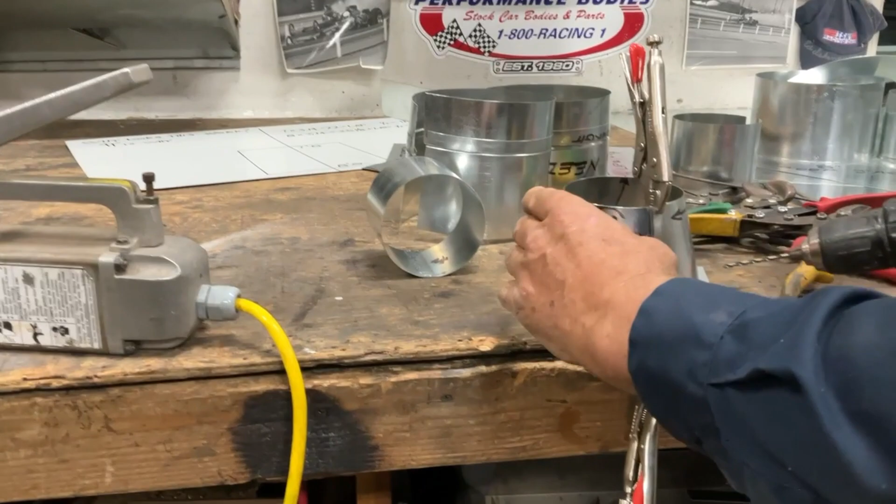Now what we're going to do is put a couple pop rivets. Always watch where you keep your hands, make sure you keep them in a safe spot. So we know we have a half inch overlap, so if we come from the seam over a quarter of an inch, we know that's the middle of the lap. Anytime we're drilling a hole, you always push as hard as you can reasonably push.

All right, one more of those. Again, make sure you put your hand in a place where you can't drill a hole in it. 1/4 of an inch off the seam.

Anytime you're drilling, you always have to be creating shavings. If you're not creating shavings, then you're not cutting. And if you're not cutting, you are generating friction. A byproduct of friction is heat. If you heat this metal, you can actually make the metal harder than it was. So if you're not pushing and all you're doing is generating heat, you're making it more difficult on yourself. So always try to use the smallest amount of revolutions and the most pressure you can reasonably put on.

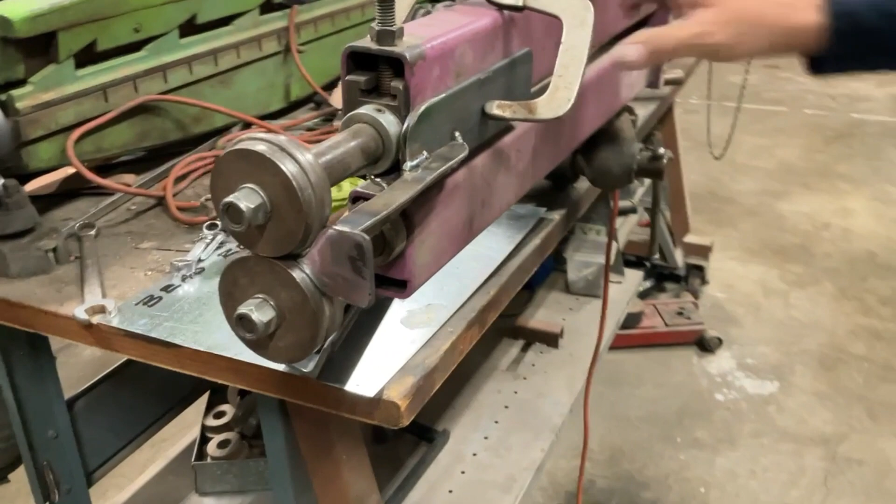Now what I'm going to do here is we're going to take our collar, we're going to put on a left glove, and this is similar to the turning machines that you will see in a lot of shops. What I'm going to do is I'm going to flare out the bottom of this collar so it matches our transition. So with my hand, I'm pushing in against the backstop, and I'm wearing a glove so I can let it slip in my hand. So once I create one full revolution and I like everything, I'm going to slowly begin to lift.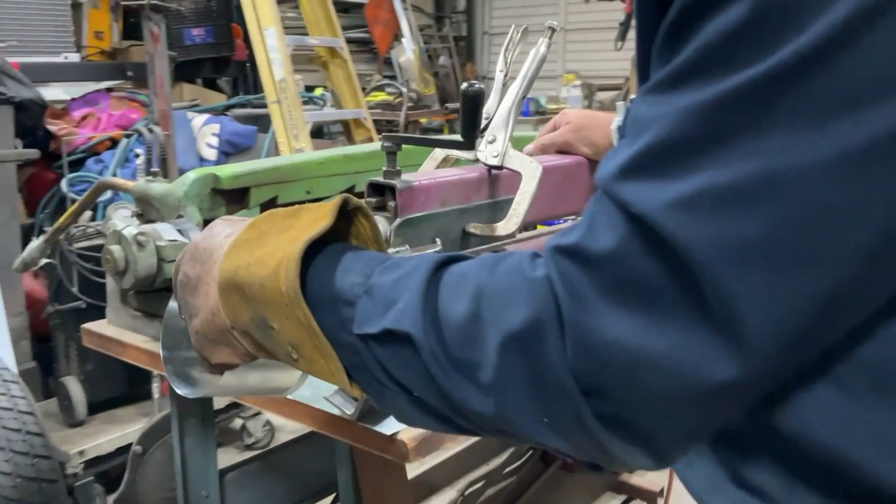Lifting a little bit more at a time. So what we're doing here is we're stretching. Can you see the angle that my collar is entering the rolls? And by the collar entering the rolls at that angle, I was able to flare out this end. So what that's going to do is that's going to make it match the taper of my cone.

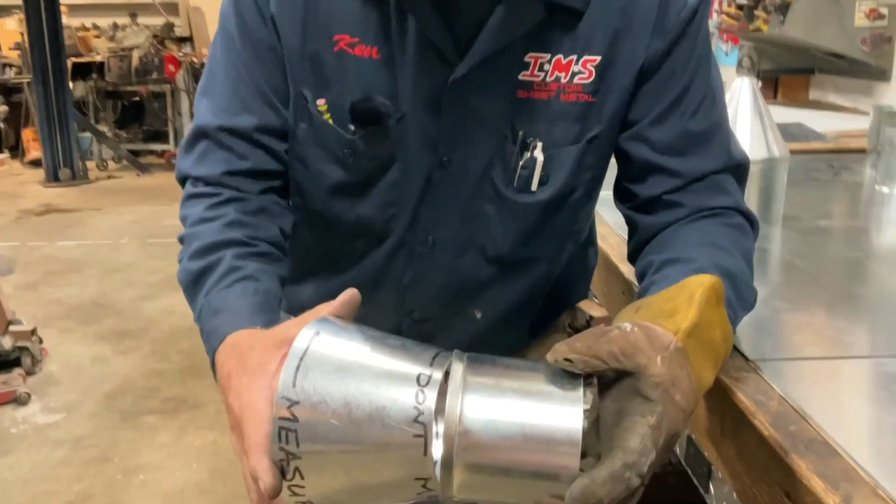So what we can do now is we have this amount, look at the amount of overlap we have here. It's important that you know how much lap you have so that you know where you can put your rivets. So we're going to push this in here. And then we're going to come in here. Matter of fact, let's do it now. Come on over here to the plywood workbench.

Let's put 4 rivets in this. We're going to put one right through the overlap. And all this is going to do is secure that lap a little bit more. Then we're going to go 180 degrees from that one. And then we're going to go 90 from each of those. Now, if this was really critical, we would actually take our dividers and we would lay out the circumference, divide that by 4, and we could step this off. We could step these dimensions off if it were critical.

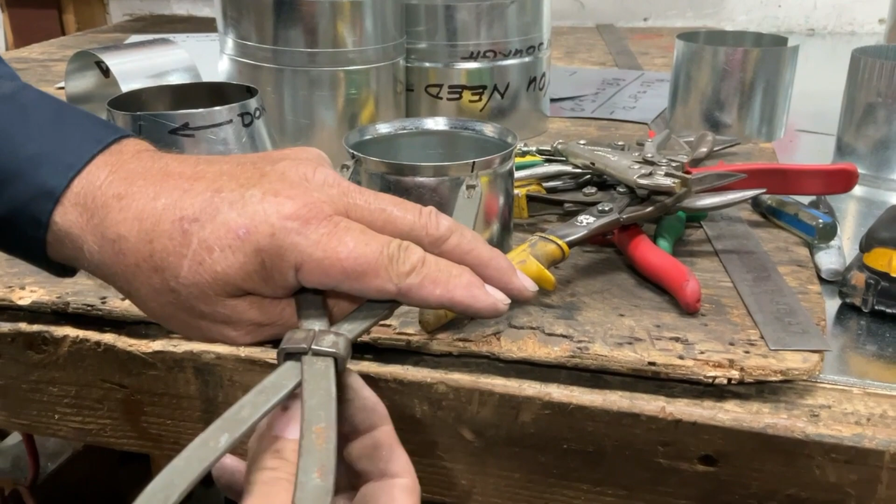Look at that, boy, we're pretty close. Right? Pretty close. So, since we're going to drill one hole through the overlapping seam of the collar, let's drill also a hole through the overlapping seam of our cone.

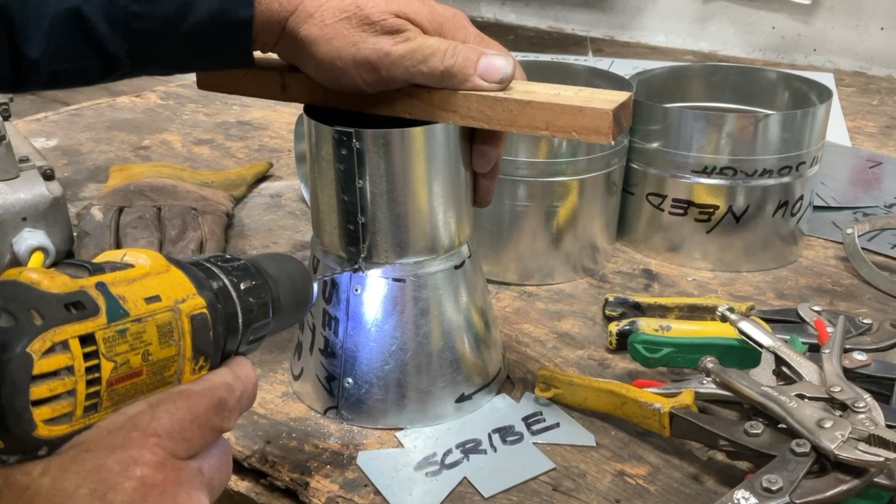You know what I'm going to do? Instead of pushing down on this with my hand, I'm going to use a board. Gonna look at it, make sure it's nice and square. Here we go. We just drilled through 4 thicknesses, so it took a little bit longer. And honestly, when I'm making this sort of a hole, I'm not pushing as hard as I want, because what I would do is I would actually spread this out. So we got that hole.

And we have, don't go away, we have a malfunctioning pop rivet gun. But look, we're going to keep going. We're going to keep going. Let's go ahead and do this, because you might as well watch me go through mistakes too. And then when they happen to you, you won't think you're the man in the moon or the woman in the moon.

All right, so now we're going to go 180, the opposite of that other one. We're pushing down to make sure we have our lap correct. We're going to go ahead and drill this other rivet out. Look at that, man, I like that. All right, let's see what kind of problem we have here. So far so good. Let's see if it works this time.

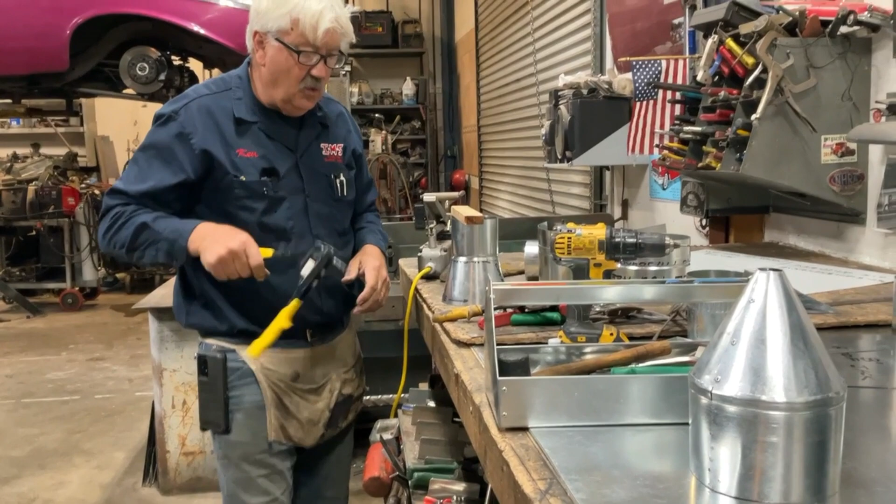Oh, baby. All right. So rather than get bogged down in the one that's trying to take us out to the woodshed, we're going to keep trucking, pushing down here to make sure that I'm out of harm's way with my drill bit. And let's go ahead and put a rivet in it. If we start drilling a number of holes and we don't fill them with rivets, sometimes things can walk around, and then when you go back to fill all those holes with rivets, some of those holes are not going to be where you want them to be.

Look at that. We got another rivet in without a problem. I'm feeling lucky. Last hole.

All right, let's see what we have gotten ourselves into here. So this part of the rivet is called the mandrel, M-A-N-D-R-E-L. See how the mandrel broke on us? It did set the rivet, it did the job, but then it broke prematurely and part of it got stuck in the gun. But I want you guys to see what happens when things don't go right. So all we're going to do at this point is we're going to drive that mandrel right through the pop rivet.

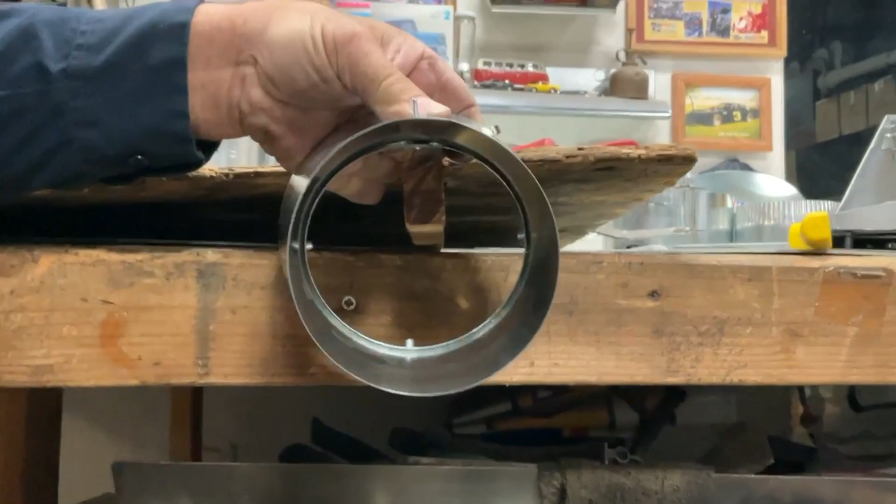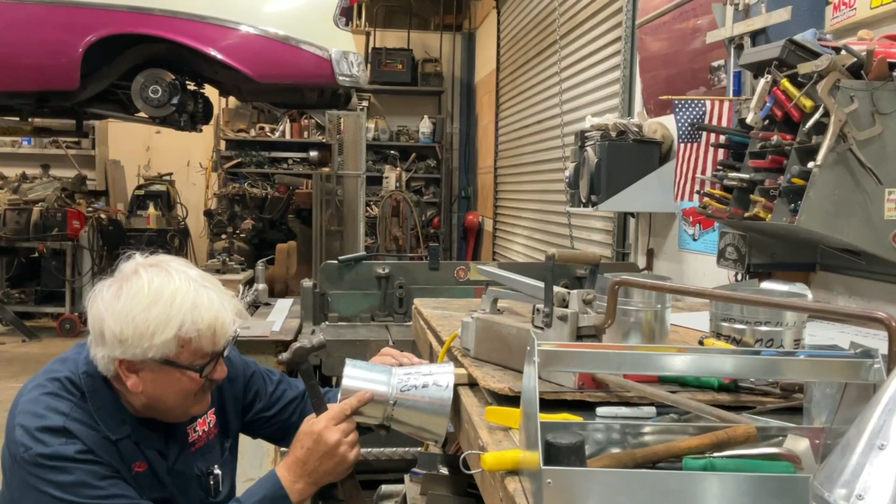And that is close. Oh, you know what I think I'm going to do? I'm going to drill a hole in my board. And let's see if we can get that pop rivet right on that hole in our board. I know what's happening here. Yeah, this is awesome. Get my hand out of the way.

I'm going to try to wiggle it a little bit. I finally got it to break loose. You see it inside there? There's the opposite end of the mandrel. What happens is in a pop rivet, so now I can go ahead and pull it out.

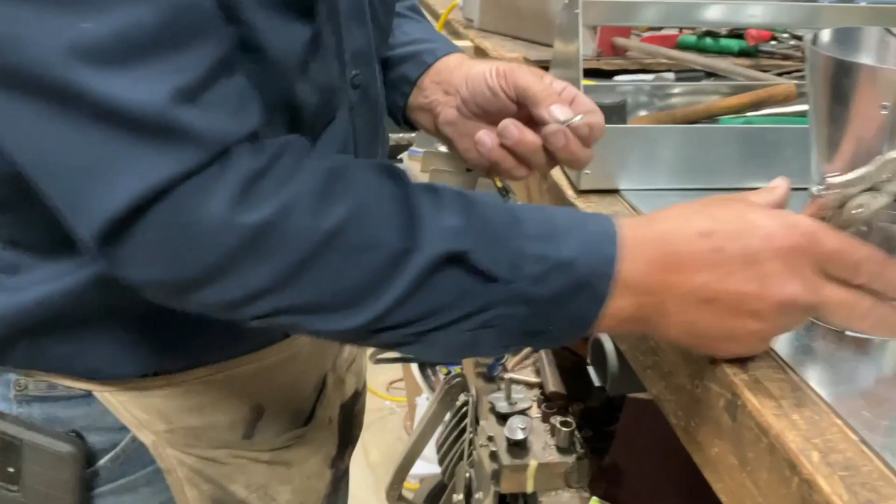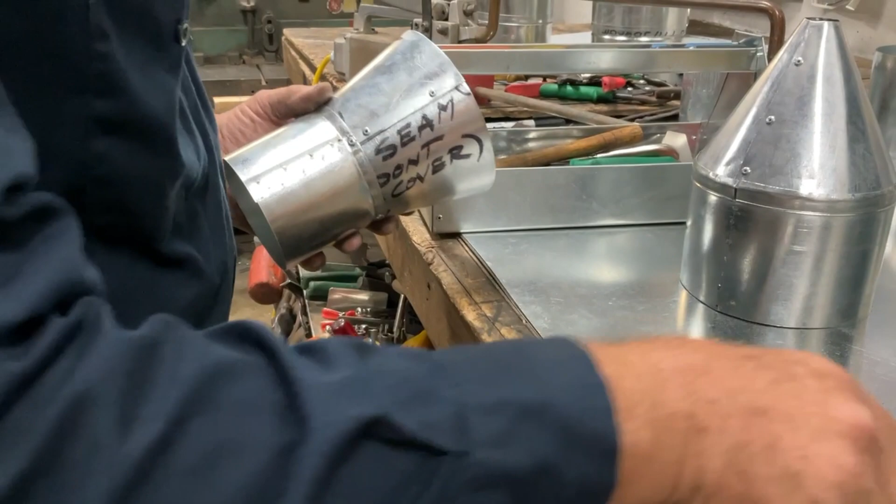So the way a pop rivet works, if you haven't looked at our pop rivet video, is this ball on the end gets pulled through the sleeve, and then it's engineered to break right here, right where they always break every single time, except during today's video. So our rivet is still good. It pulled the ball through there. We got an awesome rivet. And then the mandrel, M-A-N-D-R-E-L, broke off. And so now you just had a chance to watch some everyday problem solving.

One of the things I want to do is try to always give you guys two ways to do something. So let's say you don't have one of these, but you do have a 4-inch collar and a workbench of some kind. I want you to come over here real close, because what we're going to do is we're going to show folks how it can still be done. I've got a little block of wood and a wood table.

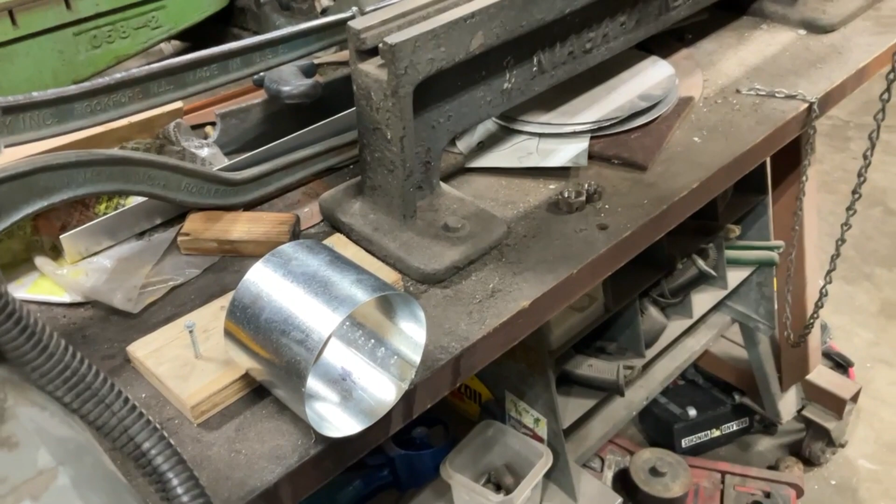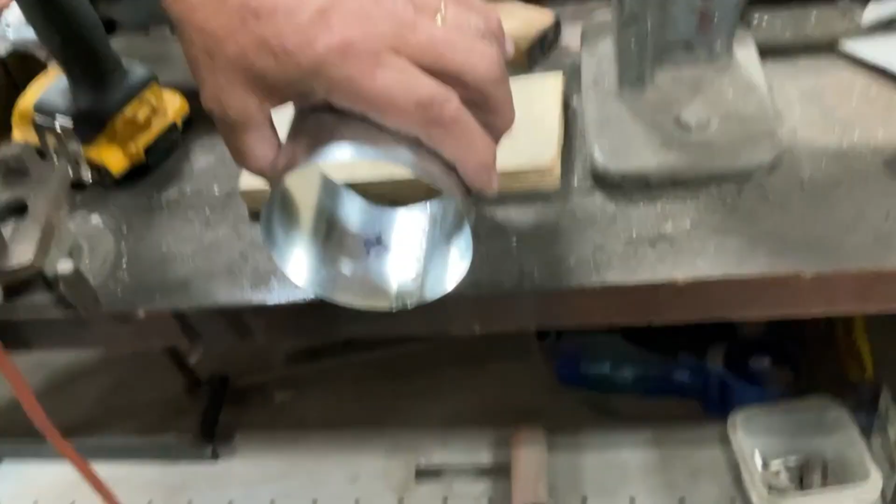Now what we're going to do, let's see, move over here to this side, and then you won't have to look at the back of my head. Well, you know what, I'll move here. So what we have now is I have a little backstop, and the edge of our collar is hanging over the table. See how we're hanging over a little bit? So you would never do this if you were at a sheet metal shop, if you were working for a living. Let me get that out of your way.

But also, I want to make sure that if you guys want to, you can do everything we're doing. So I'm just going to roll this collar along the front of the table. And we're just going to bend a little bit at a time. So what we're doing here is we're actually stretching the metal. Stretching the metal is way easier to accomplish than shrinking the metal.

The reason we put the backstop is so we would have a predictable line around the outside of our collar. We're just going to keep going around, doing it a little bit at a time. If you try to get too aggressive and do it all at once, it's going to turn the collar into an oval. Coming along nice.

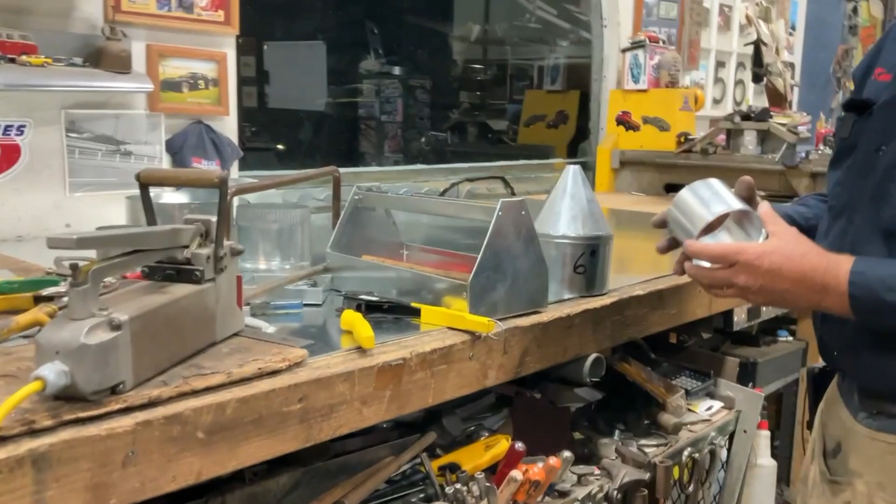So what we did is we flared the bottom of the collar out. So now we have a place - if this was our 6-to-4 transition, now we're right back to a good match. We could take more time and just keep walking around it and around it. We could get all these little dents - you see these little dents in here? We could keep going and get all of that out. But this was just a demonstration so you could see how you could flare, how you could stretch the bottom of a collar. There you go right there.

Now if you wanted to, you could rivet that right to your cone. All right, we got to a really good stopping point right here. This video is going a little long. I packed in so much good information. I want you guys to come back for part 2. Part 2 will finish this up. It's going to answer all your questions. You're going to have a sense of accomplishment, and you're going to be glad that you watched Sheet Metal is Fun. Thanks for coming by. We'll see you on the second half of this lesson.